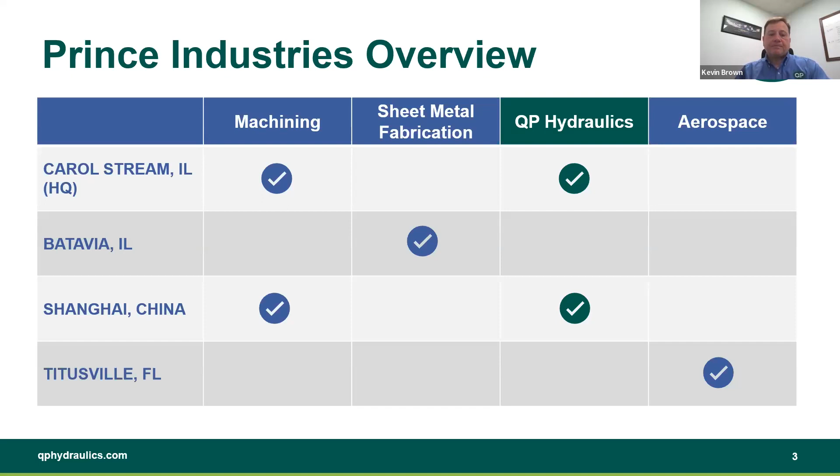Over the past few years, we've wanted to bring that expertise that we have learned over the years back to the North American market, and we've done that through OEMs and distributors. And really, Matt has done that with his extensive experience in the market. Matt, you want to say a little bit about our expansion into North America? Yeah, and I appreciate that, Kevin. We've been currently working with several key distributors and OEMs. We're really looking to grow the distribution market. We see that as a key growth opportunity for QP Hydraulics.

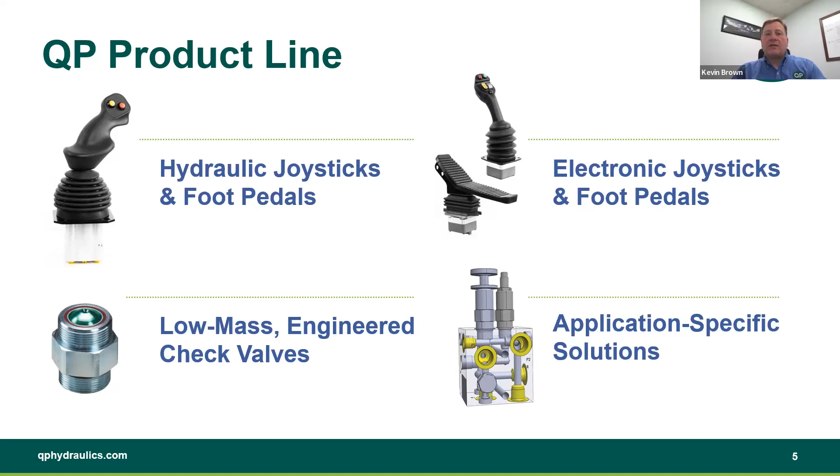This is where we got our start. Over 20 years ago, we started working with CAT on their CAT design joysticks. And it really gave us an education into understanding not only hydraulic joysticks, but hydraulics and the manufacturing around that. We were fortunate enough to work with them and came up with a design on our own, which we used to call our JS446, which I will be referencing as our JSH. And we brought that and several other products to the Asian market, and it really took off.

Once we brought that to the Asian market, we realized there was a lot of other products that we needed to expand into, and with our JS446 it was easy to expand into those markets. That was single axis joysticks. So we have our SLH, which is our stackable version of our single axis joystick. We have stacked up to 10 different stacks. So if you want a 10 stack joystick, come see us.

We also have a thin single lever. That thin single lever is only 22 millimeters in thickness. Works really well for that small bulldozer blade at the bottom of a mini excavator. And then we have our dual axis configurations, our JSH, which I spoke about, and then its sister valve, our JSC, which is a compact valve. The difference between those two is just flow or max flow. JSH can do about 25 liters, a little bit more actually, and the JSC can do around 15 liters a minute.

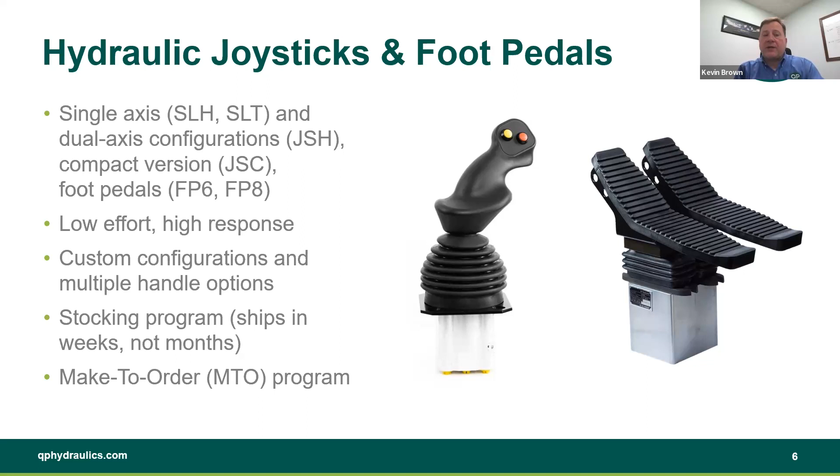We also have a stocking program. Our stocking program, we say, ships weeks and not months or days, and then we have a make to order. Real quick, I'll go over that stocking program in big, bold letters. Hydraulic joysticks in weeks, not months. In fact, we have 1,000 joysticks on hand right now. They're detailed on our website, so you can see which configurations we have, that we can get you in days, not weeks or months, but days. 2 to 5, 3 to 5 days, just depending on which one it is and how many you want.

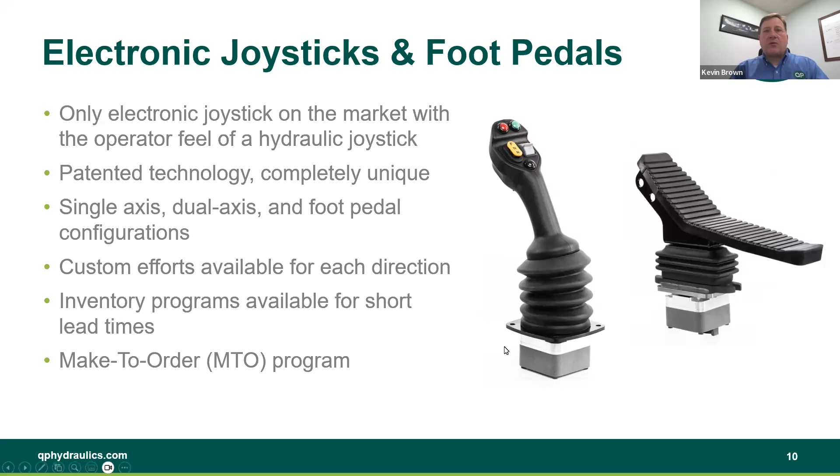Our spec sheet looks very similar to other competitor spec sheets. We have supply voltage, 9 to 36 volt continuous. We have a max current consumption of 20 milliamps. We have an analog option, 0 to 5 max, with a check signal up to 2.5 volts. We have CAN bus, CANopen, or custom CAN, which some of our customers have a custom CAN that we have to program, and that's fine too.

What sets us apart is our inputs. We have a total of 19 available digital inputs, and if you sacrifice 5 of those, you can get up to 5 analog inputs as well. So you could get 5 analog and 14 digital. Really can make those handles with lots of buttons and lots of switches if you need to.

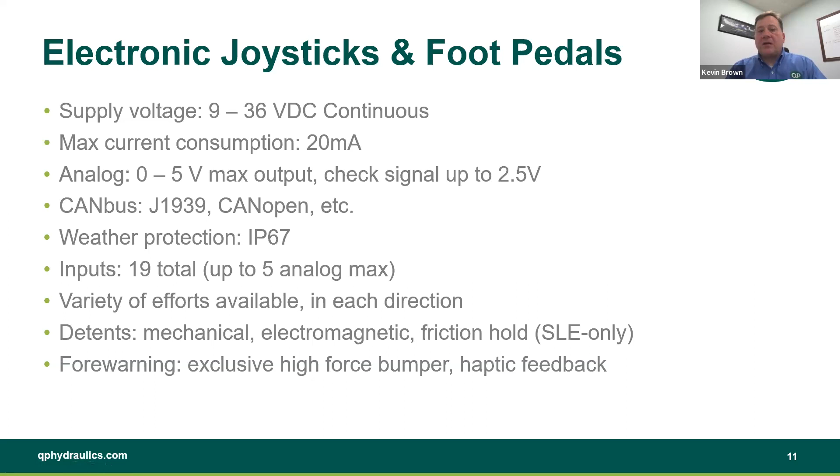We have a variety of efforts available in each direction. Like I said before, in each direction. So if you need to change anything in any direction, we can do that for you. Along with our hydraulic joysticks, we have detents available, mechanical, electromagnetic, friction hold, all of the same options for our hydraulic joysticks as our electronic joysticks. Forewarning bumpers are there as well. So basically what I'm trying to say is all of the options for our electronic joysticks are the same as our hydraulic joysticks. With that, I'm going to break and see if we have any questions, Eric.

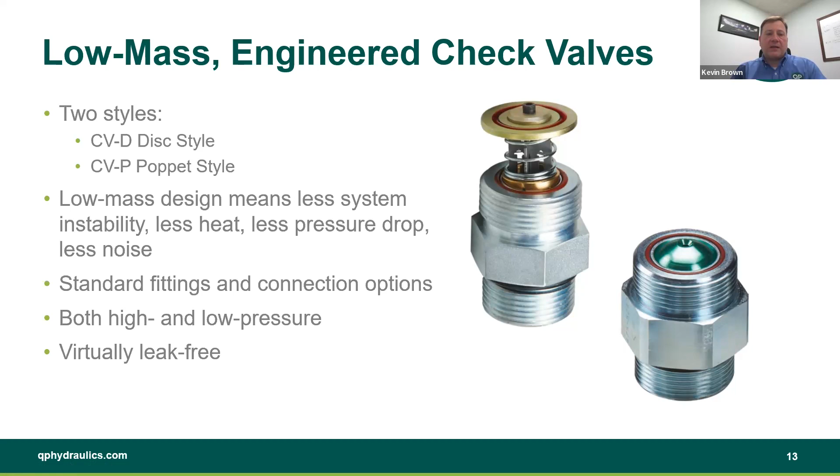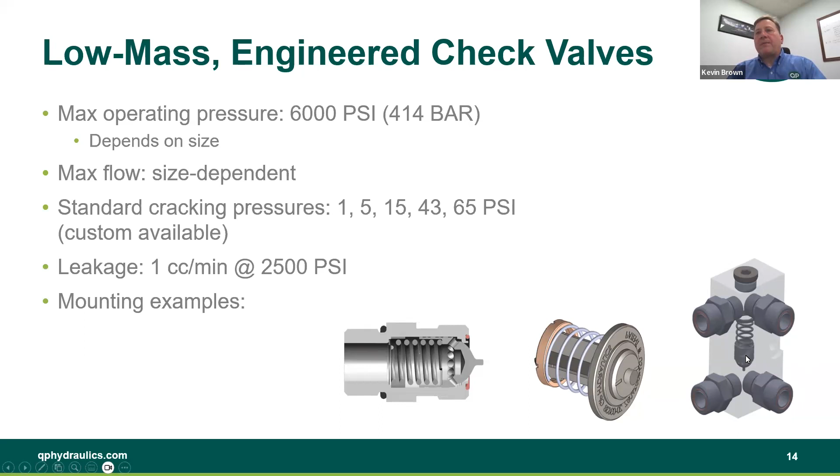We have several mounting examples. These are just a few mounting examples of what we have done in the past. And you can see here, this is just standard inline. This is our poppet style. You can see why we have less mass. A, we use aluminum, and B, we cut out all that mass from the inside. Yes, this is a 6,000 PSI check. This is a close-up of our insert check, and this is just an example of one of the manifolds that we've designed with our poppet check inside. What's exciting is we have a cartridge design coming soon.

So all the benefits of our poppet are going to be in a -10 cartridge very soon. And when I mean very soon, hopefully we're targeting the summer that we'll be able to offer this to the market. It's going to have a max operating pressure of 6,000 PSI. It's going to be in -10 first, and we're working on the -8 right behind it. So cavities, we're going to stick with the standard dash first, and then we'll get into the specialty cavities. Max flow on this -10 is 20 gallons a minute at 150 PSI. This one we are going to stick with standard cracking pressures for the immediate, and then go to customs later. So we're going to offer it at 5, 15, 43, 60, 65, and 90.

Leakage is going to be the same as our standard poppet style, 1 cc at 2,500 PSI. And the nice thing, and what sets this one apart, is the porting is 1 to 2, or nose to side, or side to nose. The side to nose is going to look exactly like the nose to side. Nice thing about our design is you can just flip that poppet around on the inside and you have a different cartridge.

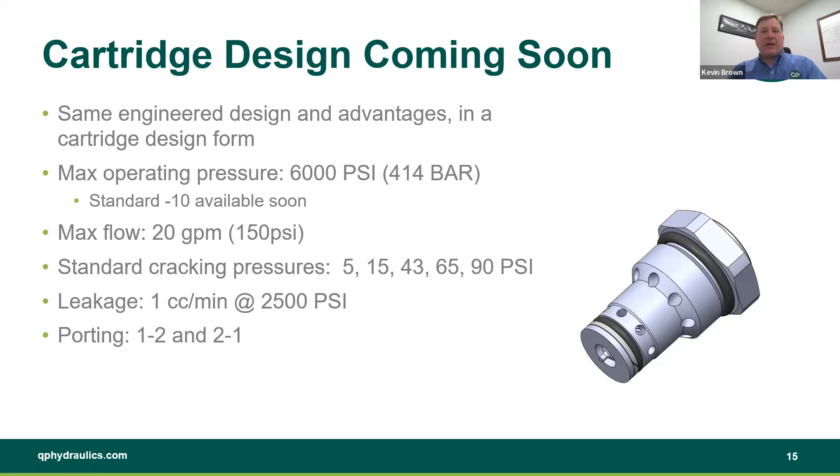Somebody wanted you to go over why choosing a poppet over a disc check. Great question. We only have 2 sizes of disc checks, so you're going to either get a 16 or a 12. So disc check and poppet from a pressure drop situation or a high pressure or low pressure situation is very similar. We have a patent on that disc check, so we can pretty much do whatever we want with it. The poppet check is quieter. I will say that it's quieter and it's more damped. It has a little bit better pressure drop than the disc check, and

sometimes it's more flexible. That poppet can be flipped around in multiple directions, and the cavity is very, very simple if we want to design a manifold with it. The difference is one's steel and one's aluminum. However, they both can do high pressure. Hopefully that answered the question.

Yeah, I believe so. So this is actually an interesting one. You currently have a stocking program for joysticks. Are you looking to create a stocking program for check valves? That's been brought up several times. It's just a matter of figuring out what the market really needs in the sizes that they need. Matt, I believe you are working on that. Yes, sir. I don't know if we have any time frame that we're looking at a stocking program for check valves. Well, currently we're looking at doing a little bit more data mining just to make sure that we're putting the right products out there that the customers may need.